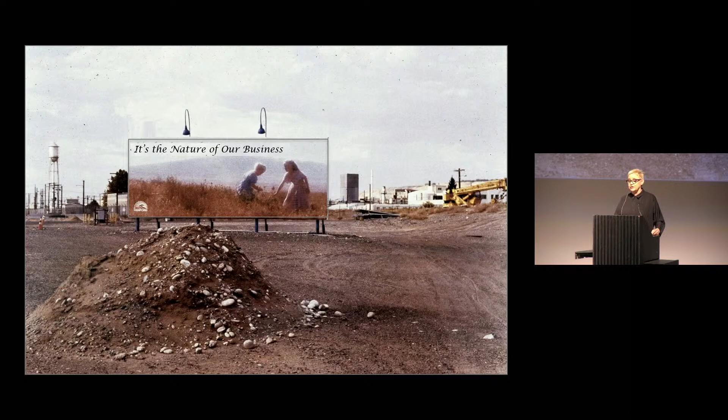This fascination with industry started early. It brought on, as a kid of one of 8, riding in a station wagon, riding past the belching refineries on the New Jersey Turnpike. I remember also being curious about the nearby modest homes of the workers in this part of New Jersey where the accent is quite strong.

That childhood curiosity grew while I was an art student in Pittsburgh. The steel mills really sealed my obsession that has fueled three decades of my life's work. And it's amazing. In fact, just a few years ago, I worked on the regeneration of this very mill. So things do come around.

There's no doubt in my mind, and I think in anybody's mind, when they see this map, that the landscape needed some landscape architect's attention.

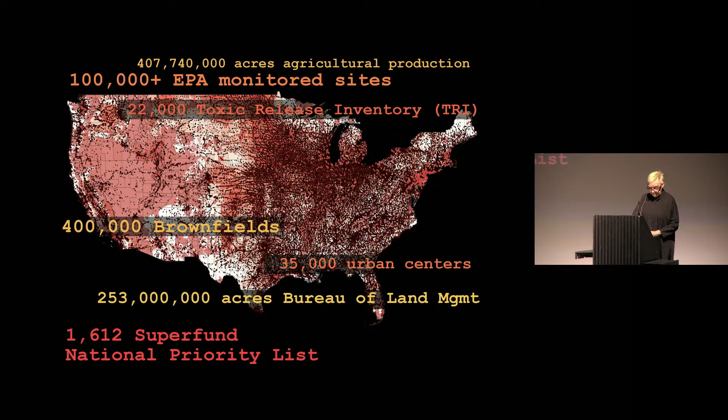Through both D.I.R.T Studio, through practice and teaching at University of Virginia, I charged into the unknown territory, and D.I.R.T was founded on doing research to probe that industrial business as usual. And teaching meant working with some great students to construct a new body of knowledge, design approaches.

So here are some of the stories. It's a bit of a retrospective, I guess because I'm getting old, but it's in five parts. I approach working landscapes with empathy and awe, like they are ugly ducklings.

I became really infuriated by these myopic technologies that were being applied by engineers—a quick fix, a green veneer, a type of camouflage. Also, reclamation laws did not hold the EPA or corporations accountable for authentic consideration of impacted communities.

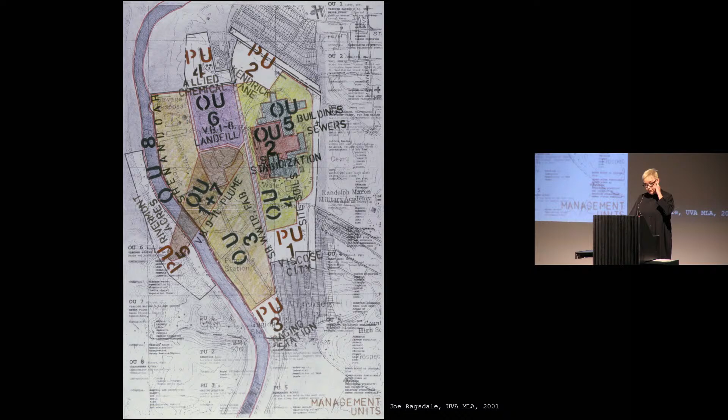My students dared to reveal what the regulations actually look like spatially on real ground with real neighbors. Here, a student translates very thick data from the EPA's operable units at the Avtex Superfund site.

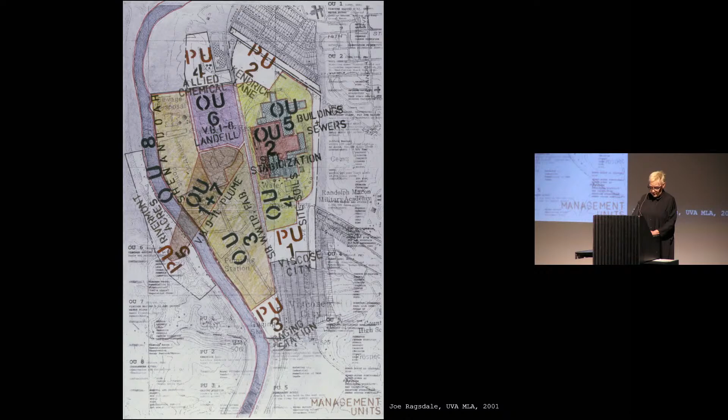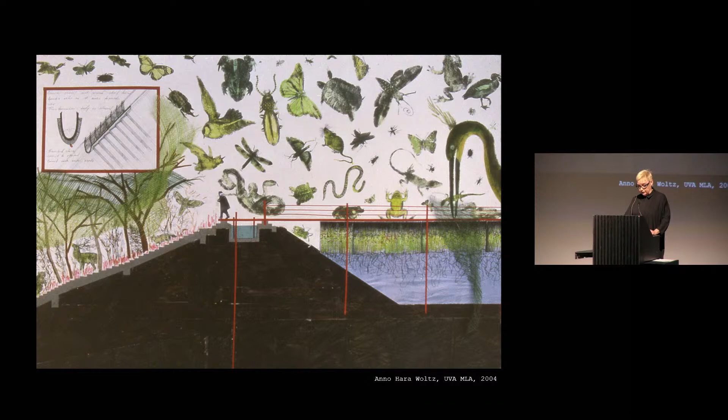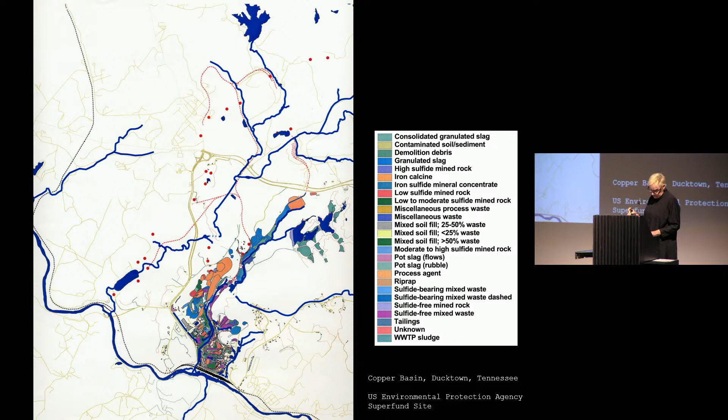While another student imagines a completely new kind of novel ecology that would emerge on the polluted floodplain through the use of biotechnologies. Meanwhile at D.I.R.T, we worked with the EPA in the Copper Basin of Tennessee, and we deciphered this sinister map with a pretty intense list of contaminants.

So we tried, in this case, to propose a passive treatment system, but the EPA was not up to the task. That happened over and over.

But at Vintondale, in the context of a nonprofit and a community-based effort, D.I.R.T joined a fantastic multidisciplinary team to make that transformation visible. The goal was a demonstration project in the coal mining region of southwestern Pennsylvania.

This was the site. It's a 40-acre floodplain with a former coking operation. And this is what it's like to work in the mine.

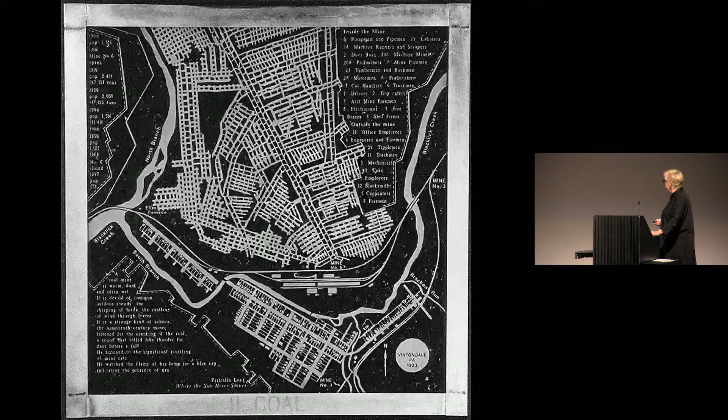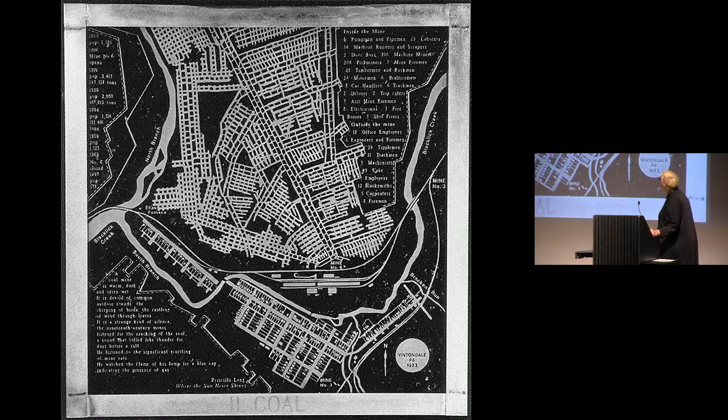Up here, these are the mine tunnels to scale with the town of Vintondale. This is the old coke works, and this is where we were taking note of the cultural presence of the workers, but also a lot of the poems and songs that were being composed about the coal mining in the region. So in some ways it was simple.

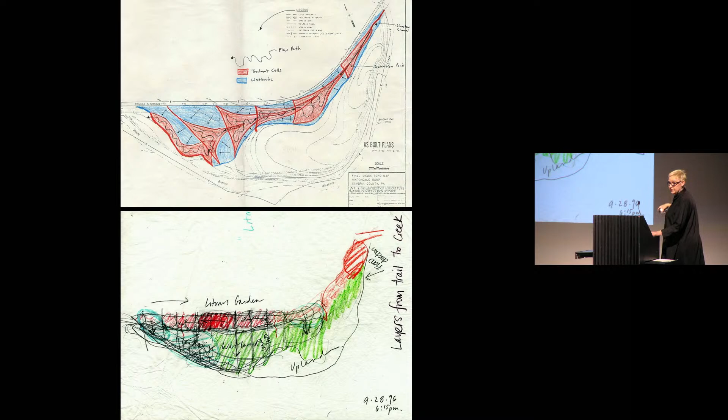And we came up with the concept of a litmus garden. This is the more detailed site plan where you can see the progression in these basins from unstable aqueous solution to biologically rich water going into the final rinse, we called it, of the wetland, and then being discharged.

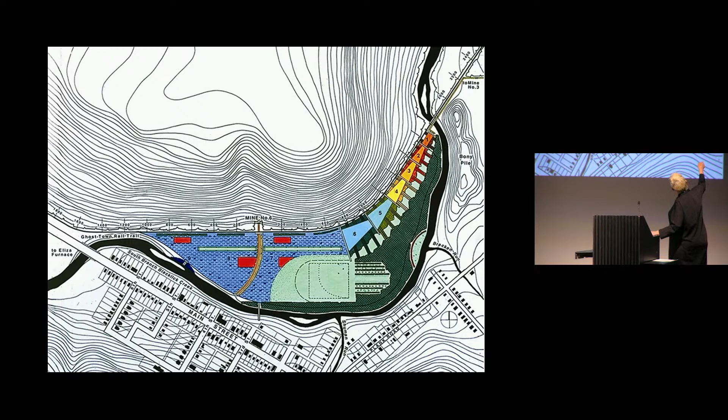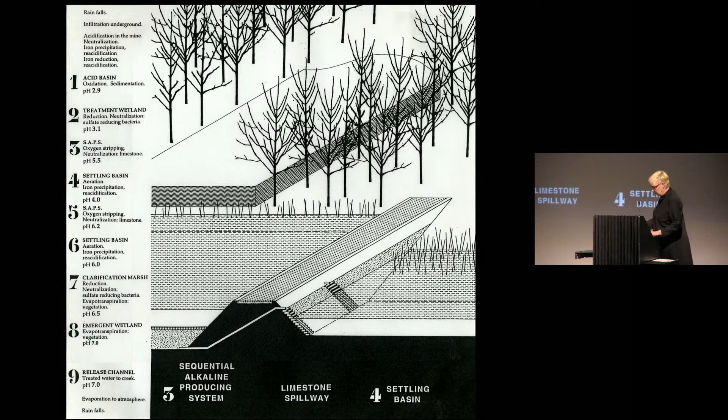But the discharge is being lifted up and taken through basically this giant washing machine. This is the sequence of what happens, 1 through 9, of this turbocharged wetland.

Those are the pH ponds. And here it is—you can see a nice AmeriCorps volunteer in one of the basins for scale. And this is it under construction.

Actually, this was us bartering with a local excavation company. They took away some of the bony that had fuel value in exchange for this excavation, this grading.

Folks in the town really wanted to help with the planting. And there it is, kind of doing its thing.

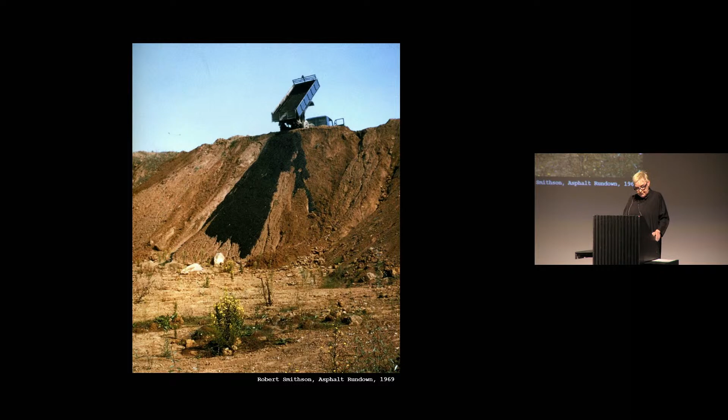His writings absolutely continually echo in my brain to push regeneration into thinking around cycles. That engaging processes, especially in working landscapes, means, in essence, taking the next shift. It's about the landscape's evolution, not the solution. Designing a course of action allows for the provisional nature of landscapes.

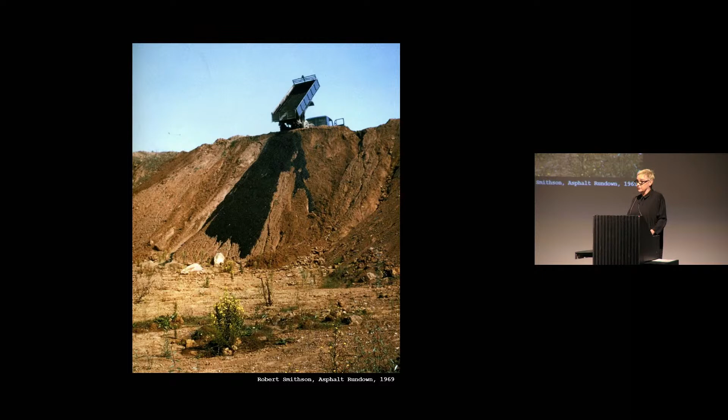So the charge is to take the next shift, to kill anybody that gets in the way with knowledge. Push the processes, not things. Question the motives. And when things get rough, call for backup.

Since 1993, my students have been game to look at alternative biotechnologies for the treatment of polluted soil and water, and they're wrestling with how to represent and think about those processes. This should be resonating with some of the students I met with today.

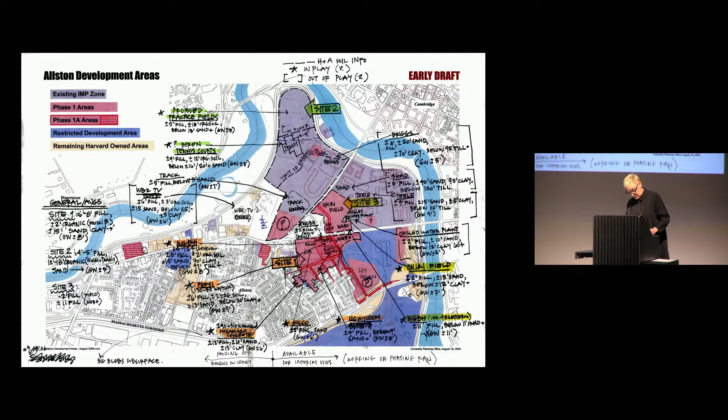While at D.I.R.T, we struggled with doing that with a client, Harvard's development group, who was about to gobble up the modest working town of Allston, Massachusetts, right opposite the main campus in Cambridge. And they actually made the mistake and thought that we didn't know how to read soil maps.

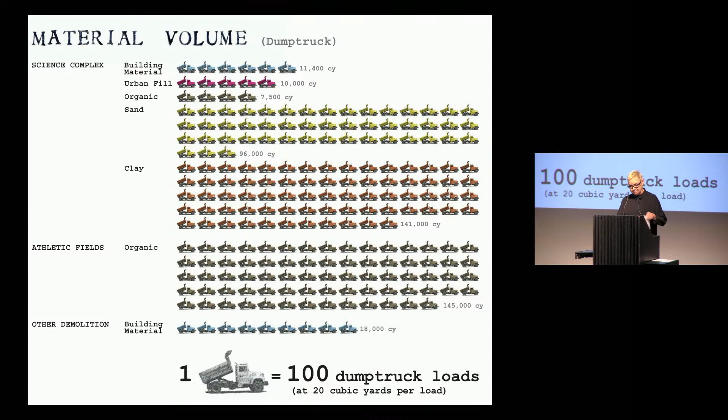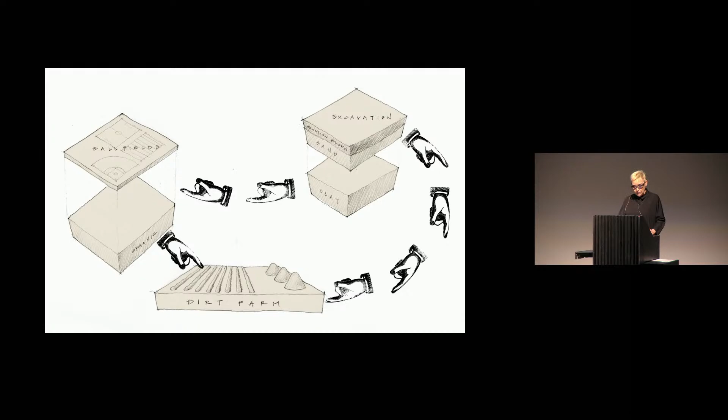We know how to read soil maps. We showed them that thousands of trucks full of dirty dirt and other soil compounds would run through the neighborhood streets. And we said, why not treat the soils on a nearby abandoned Sears site and reuse it locally or at any of the number of nearby Harvard properties?

We called it the D.I.R.T dance, a jumbo operation of cut and fill and treat. And in that case, as in a lot of other projects, we got a pat on the head and shown the door.

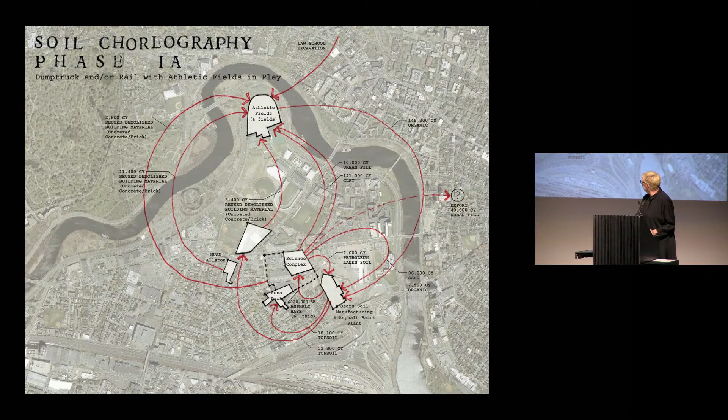Meanwhile, in Dearborn, Michigan, we had another go at this idea with the Ford Motor Company, and Ford and a great interdisciplinary team, of course, again. And you can see this is 1,200 acres, we say, of churn and burn and funk.

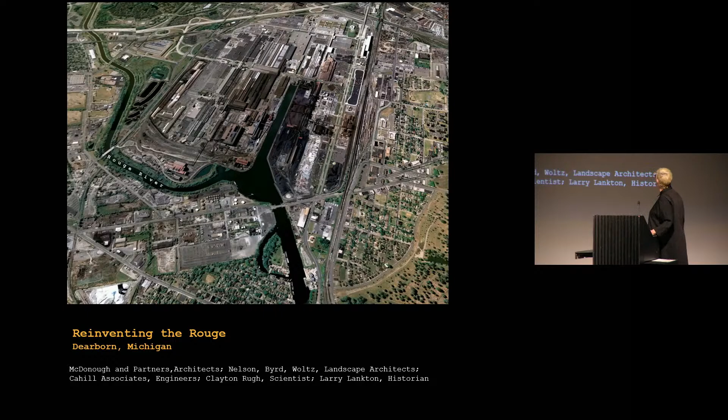In their 2000 Y2K campaign, they were looking for alternative ways of thinking about reinventing the Rouge river plant. And we found that first and foremost, their approach was extremely conservative. It was odd that we had to remind them of how important the River Rouge is, as it's been depicted by the artist Charles Sheeler and Diego Rivera.

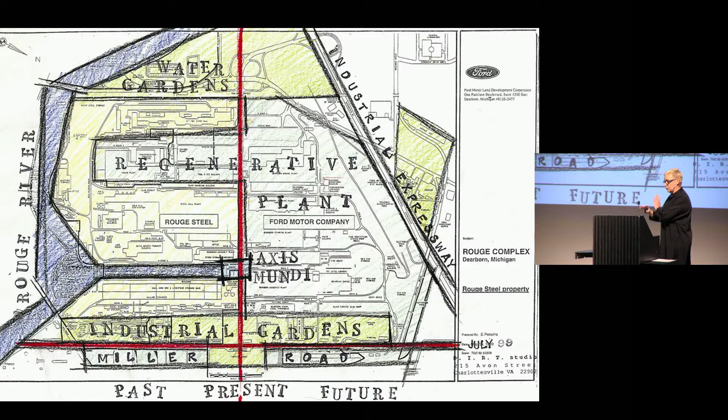This was a very first quick sketch when I landed in Detroit to conceive of this idea of a level of transparency along this main road where they had, in the 70s, put up soil berms and evergreens. They just did not want people to know what they were up to, and they probably shouldn't have. But now it was time to reveal.

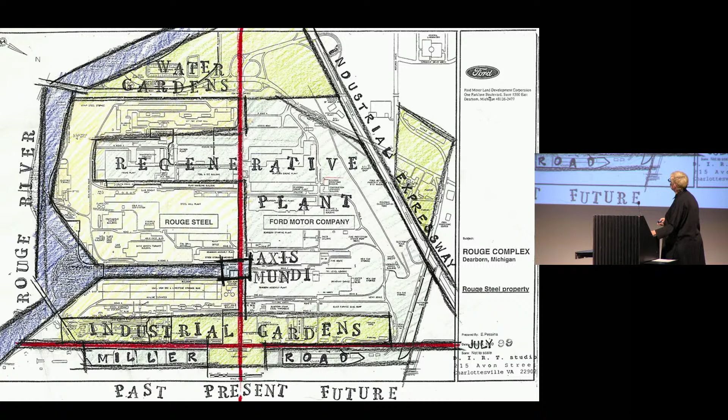So turning that road north and south here, you can see that we wanted to create a narrative along that road about the future, where Bill McDonough did his giant assembly plant with the largest green roof, blah blah blah. But our interest, D.I.R.T's interest, was down having to do with the past and the abandoned coke ovens.

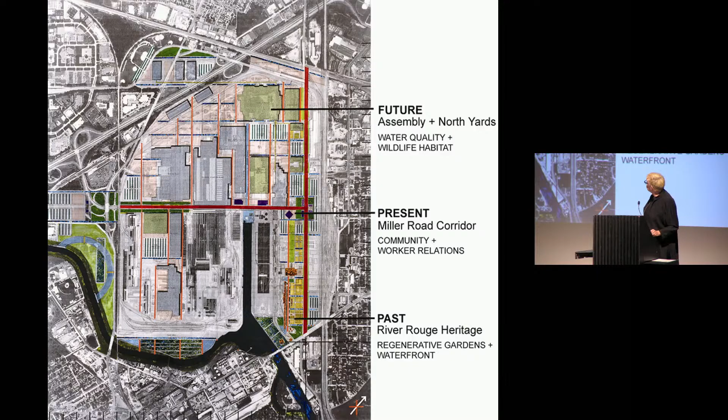So for us, what's kind of embodied energy into soils, albeit good and bad, is just an incredibly culturally rich landscape that should just not be covered up or thrown away.

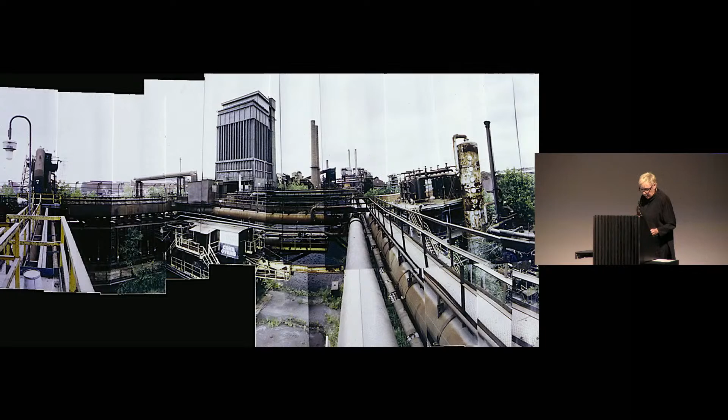By the way, that's Bonnie Clyde, Bonnie of Bonnie and Clyde. Mean mother. And this was the abandoned coke ovens. Pretty wonderfully sublime. And the idea was simple.

We used the word remediation because they had a fit anytime I said regeneration. And it was about curating the site, we made a huge argument with the historian to keep the coke ovens.

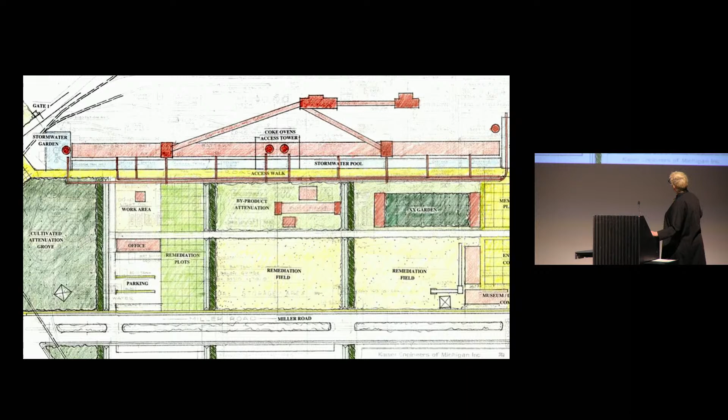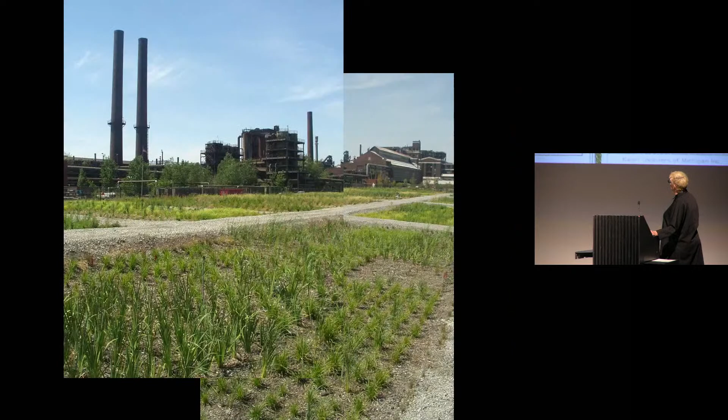And then in the foreground, along Miller Road, have these remediation gardens, these fields, where the scientist Clayton Rugh, local expert on phytoremediation, came and began to cultivate this garden for phytoremediation, but also for data that he gathered in order to move on to some other Ford sites.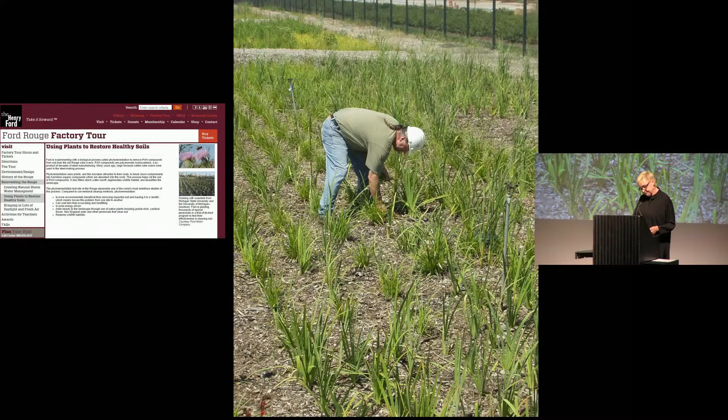In the end, even though I've met with a lot of opposition to this idea, Ford got a lot of press out of it, and Clayton, Dr. Rugh, gathered enough data to be working at a lot of other Ford sites.

Where am I? Not here. Anyway, unjust ground. There it is.

When you learn about toxic soils, you can't quite look at dirt the same way ever again. And when you translate that data to locate the pollution, you really truly see who's in harm's way. You know, poor soils, poor people. And this is unjust ground.

Still, I have to say that don't dig, don't test, don't tell is still pretty commonplace. And then if the soils are tested, conventional remediation kicks in: hog and haul to somebody else's backyard, and also covering it up.

And I kind of like to think that Cornelia, if she was whispering in my ear, would encourage me to persevere and to do the right thing, to champion that transparency, to cultivate some empathy, and make science a superhero.

In New Orleans, I collaborated with the artist Mel Chin, and also toxicologist Howard Mielke, to address the leaded soils in New Orleans.

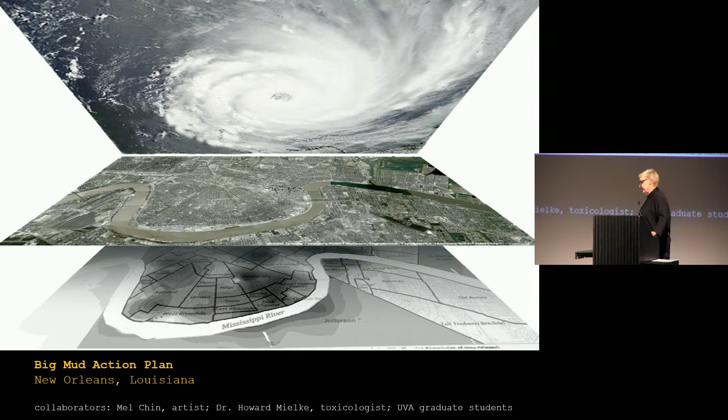In this layering of the maps, you can see this is the lead map that I'll show you in a minute, but that, you know, there's the city, and then that's, of course, Katrina. And like Mel said, the lead was the disaster before the disaster.

So here's the map. Dr. Mielke hadn't spatialized it yet, so he was quite happy about this, to see exactly what neighborhoods were in peril.

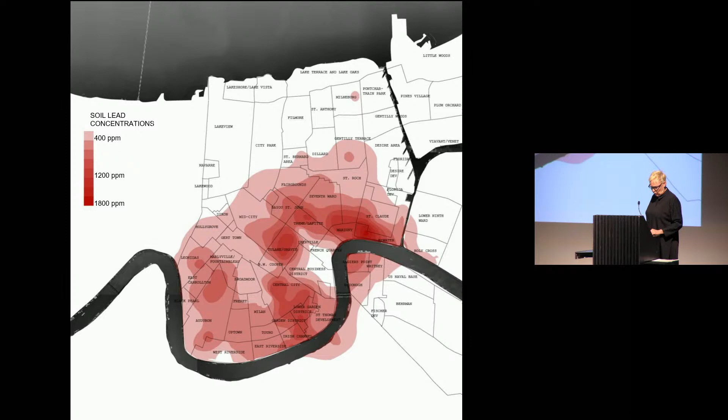And by the way, just a little fun fact worth knowing is that the EPA's maximum on leaded soils is 400 parts per million. But then you read the research, and in fact, leaded soils are hazardous at 100 parts per million. So you have to kind of wonder what the EPA is prioritizing.

We actually took on maybe a bit of a perverse idea where, with a lot of the properties and houses being gone, it was time to rebuild New Orleans from below the ground up, not on top.

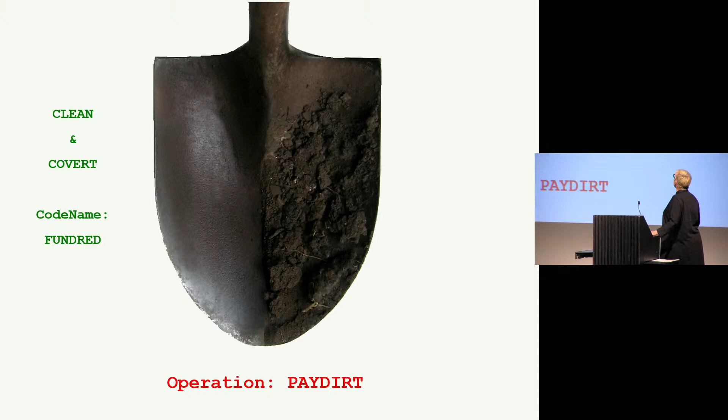Oh, this is this funny thing Mel did. So here we go, here's our operation, Pay Dirt. He worked on a fundraising campaign, and we did the difficult and dirty big mud action.

Science, love science. So lead combined with phosphate in this form of apatite 2 becomes pyromorphite, which is a non-bioavailable form of lead. So we basically were talking, and the other part of the recipe was...

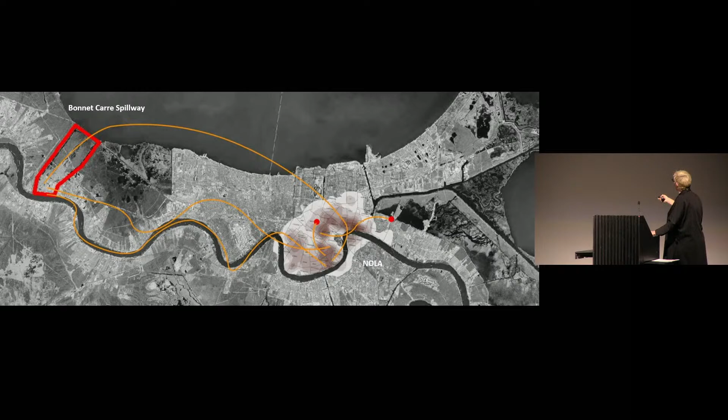...that we would produce sediment. We would lock the lead, and then there'd be sediment, and the sediment was plenty of it at the Bonnet Carré spillway, and we were looking at different ways, via barge, et cetera, to bring it in. So there you see the recipe is locking the lead and then adding the sediment and vegetation.

We came up with this idea of a nested scale of operations that goes from an extra large mud depot, where the materials would come in from the Bonnet Carré, all the way down to an extra small yard.

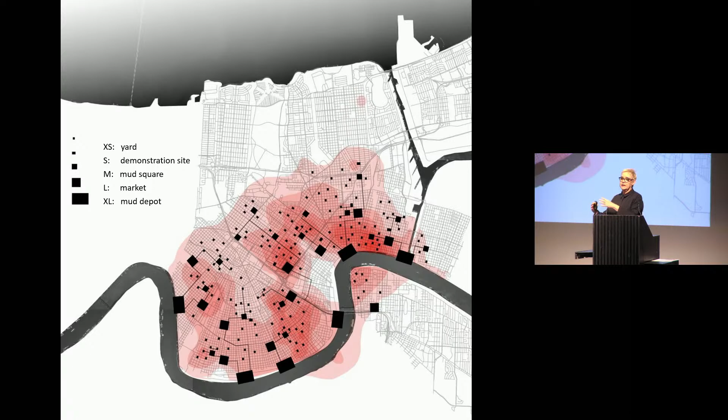And at every level of the scale, there would be different people involved. Our extra large would involve the Army Corps of Engineers and the city, and then down to the small and extra small, down to neighborhood and community organizations.

So there you see this idea that, again, it was an action plan, nothing like a master plan, to know how these materials would be distributed throughout the city.

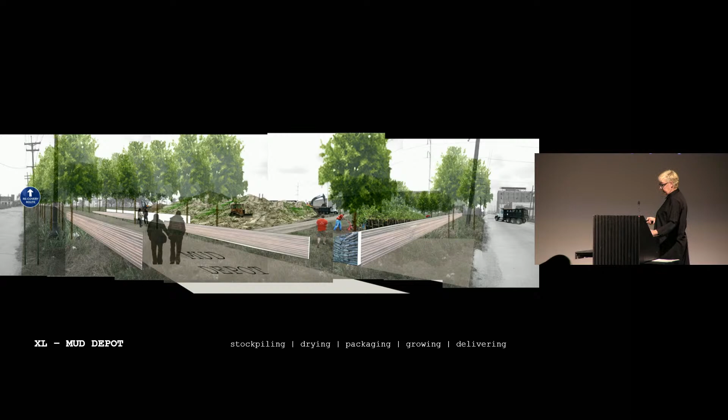So for working traces, I'd say that in all my digging around site histories, I think it maybe is already obvious, but site histories became absolutely paramount in D.I.R.T's design approach.

And I found myself starting to gravitate towards non-toxic, but still very degraded sites, manufacturing or infrastructure like the High Line, with folks in those circumstances living there and living very nearby.

Now I had to learn about working with those traces of hard-working sites, and the site forensics became paramount. And the primary act of design in this case became one of finding.

And in this case, form becomes more than site-specific. The form is generated from the site and by the site.

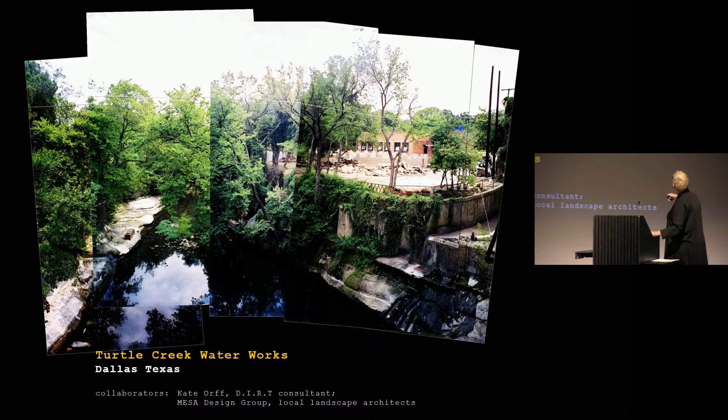So this is the Turtle Creek Waterworks. You can see there's the pump house, and this is the spillway right down to the deep creek. Wonderful old waterworks, pumps and tanks, et cetera. It's shocking that my client bought the property before it would get demolished and another kind of McMansion would be built there, but she rescued it.

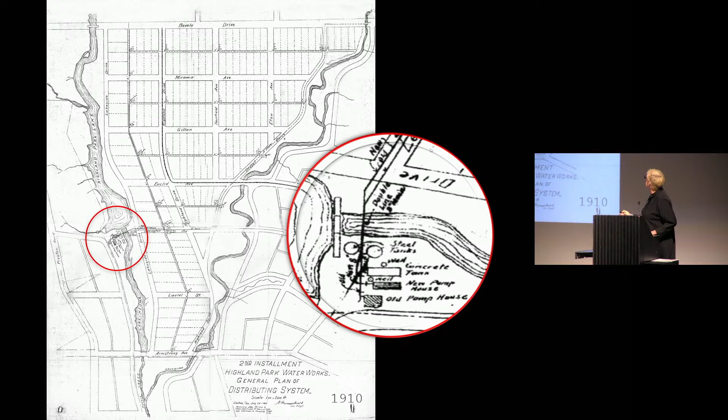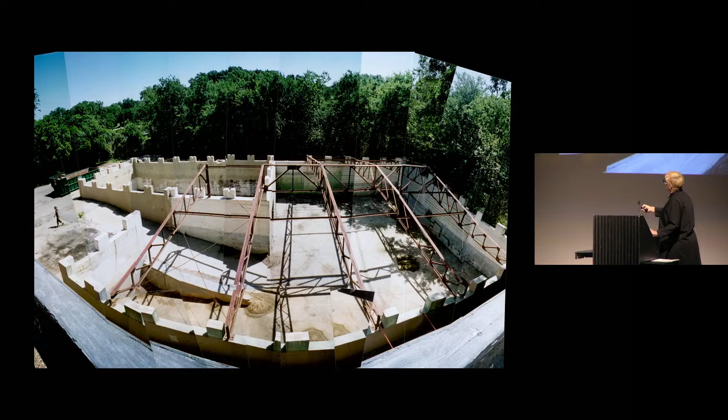And there it is. I arrived and was like, wow, all I could do is mess this one up. So, collaborator Kate Orff - folks know Kate Orff - she was my collaborator.

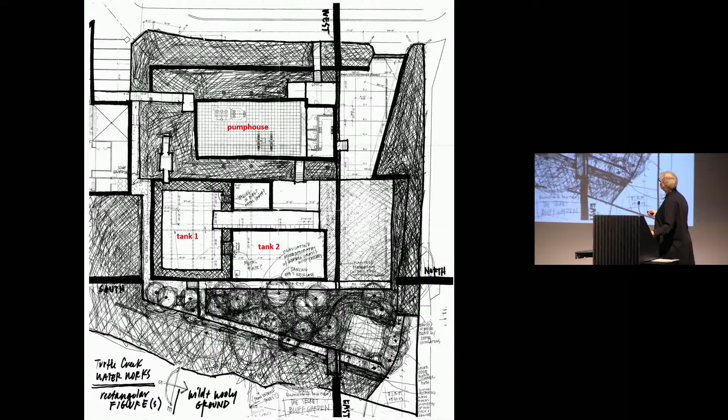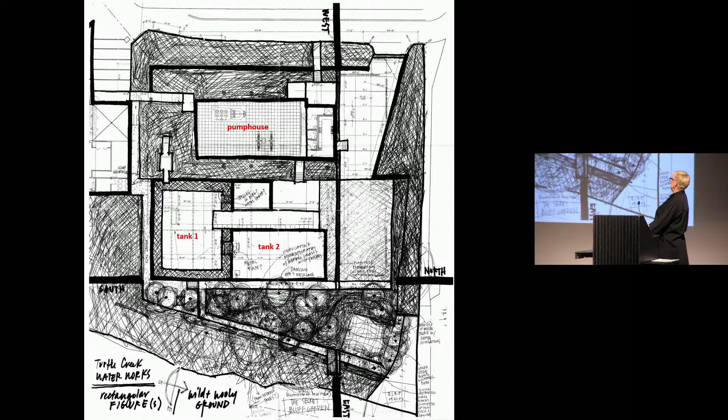The idea was super simple in terms of working with what was there, but maybe turning up the volume on some things and turning the volume down on others. There were the three voids, amazing voids, of the tanks. The idea was to pull up the adjacent wild landscapes, like a big blanket up around those voids.

And the idea was also around the tanks to make this kind of porous ground.

They're lovingly putting it into place. I have to say, one day I was hearing the crew talk in Spanish, and all of a sudden I heard 'Barney Rubble.' I went, Barney Rubble - thank you for that.

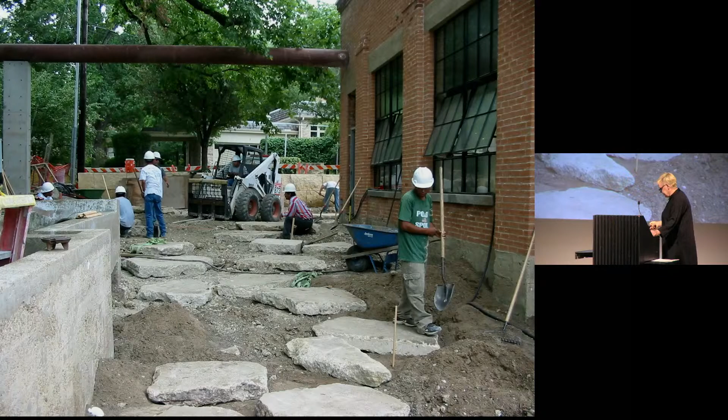In this case, in the water filter tank you saw, we found the plumbing. We just kind of, like I said, found the plumbing and turned it back on - which she does in very limited ways, to not go crazy with water.

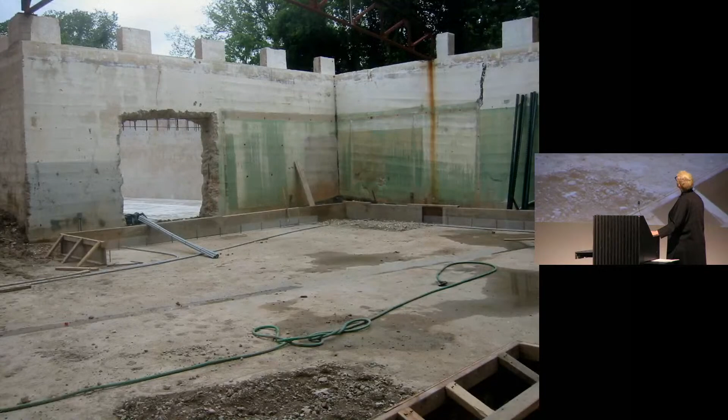But this is kind of bringing back the operation of the pump house - how we found it, kept it pretty much the same. Again, we just found the plumbing and turned the water on.

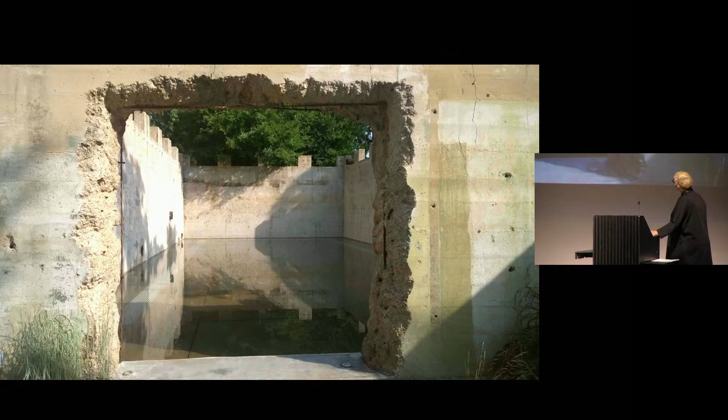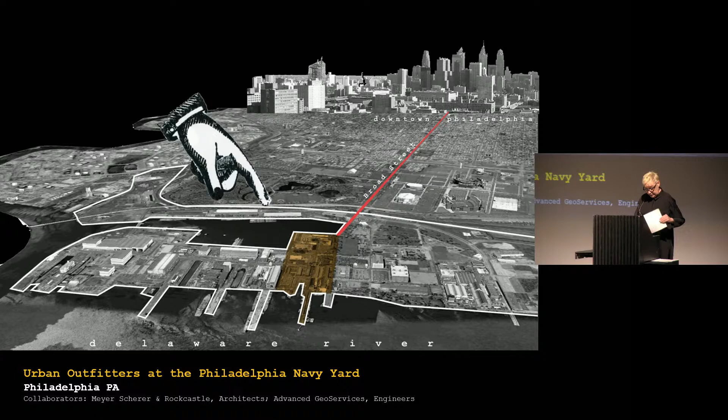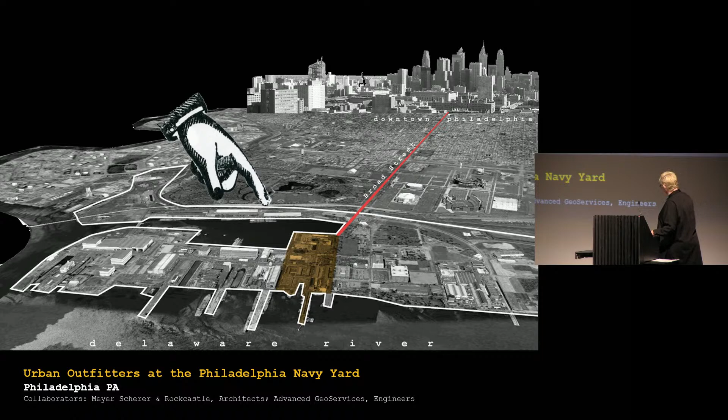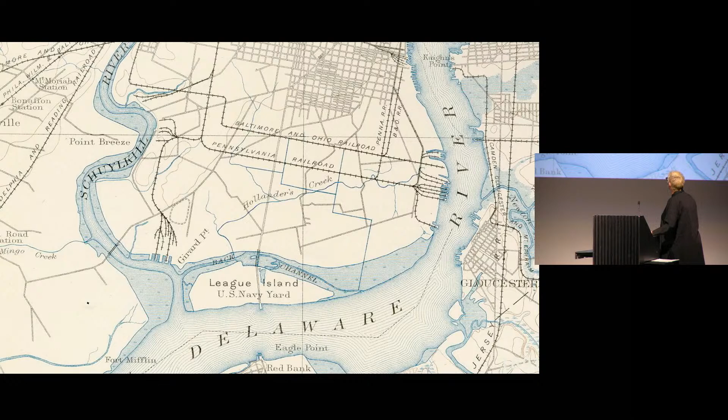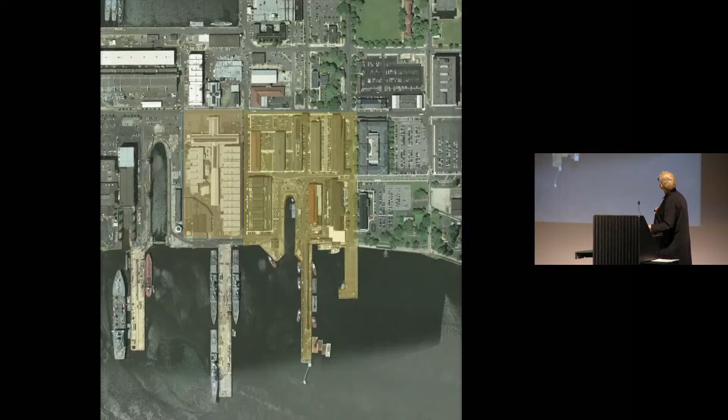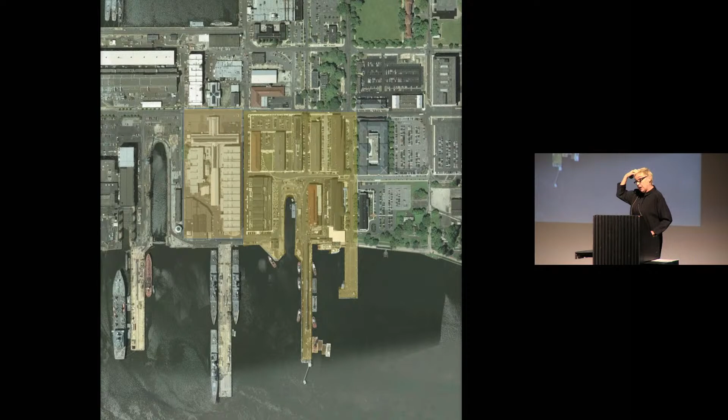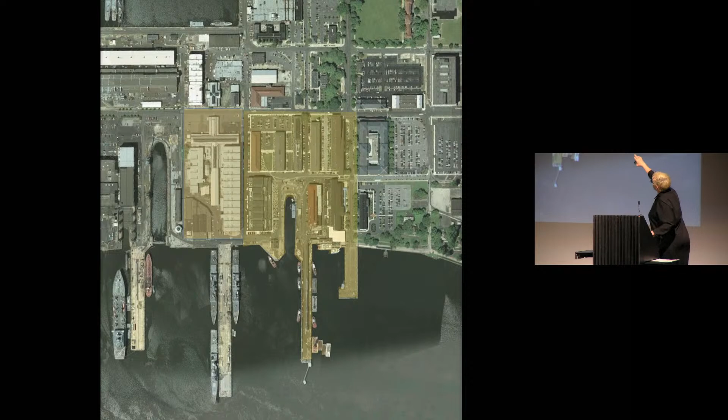Pretty big site - really, really large, massive buildings. I have learned a lot about scale working on these projects; I always add a zero to what I initially think. And just the beautiful grain, and then that's the dry dock that's carved out in the middle there.

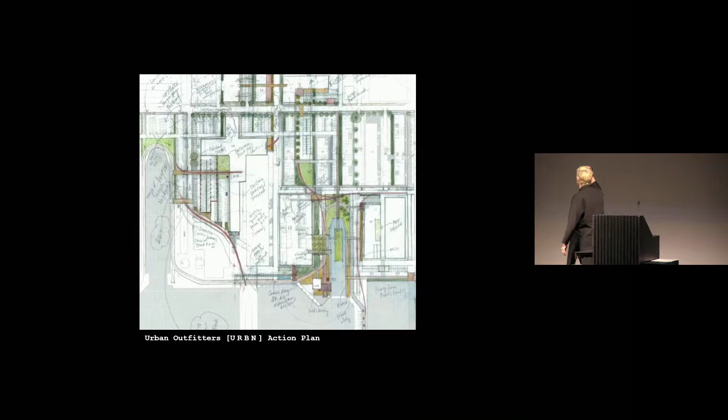So these are part of the forensics, the really important forensics - sorry for the quality of this. But this is also a case where we do an action plan, not a master plan.

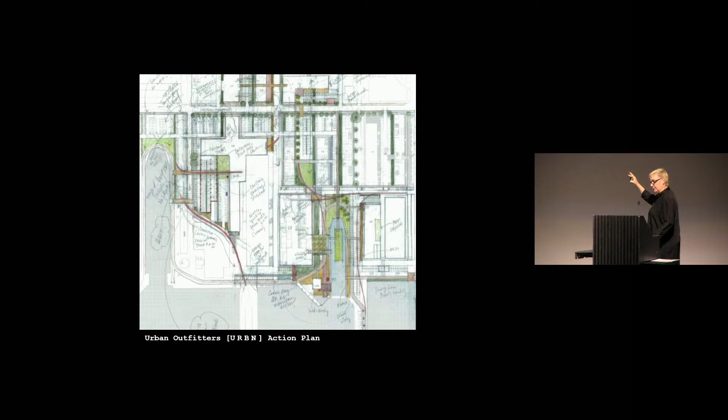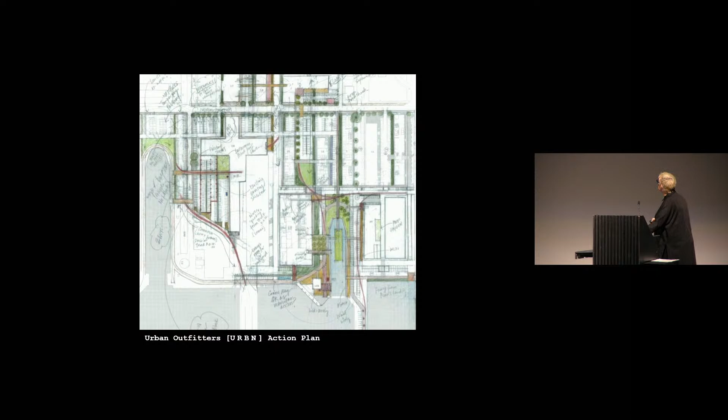This is me working with the head of Urban Outfitters, Dick Hayne, and we're just talking about what will structure the landscape to develop over time. As you can see in red, I just became obsessed with the rail lines as a way to structure their campus - and this is what we encountered when we got there.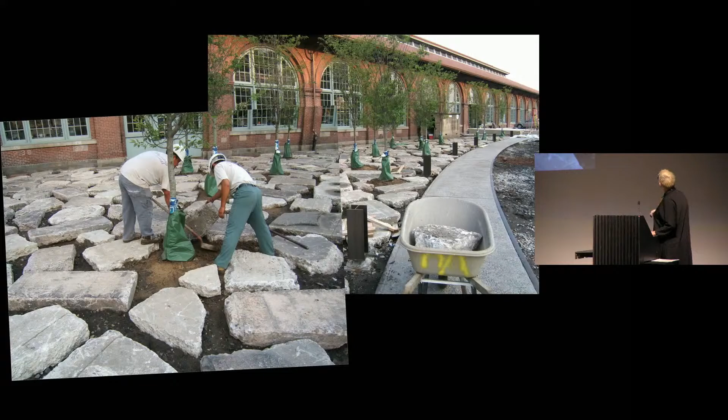And all the other debris that I didn't allow to leave the site, they stockpiled it, so there were sized pieces of concrete, brick, and asphalt. That's my wonderful contractor who learned how to do Barney Rubble like an expert. And there they are, having at it.

And Barney actually became kind of part of the urban branding, and it took all sorts of forms here in the garden at Building 543. It's black locust and some wild and woolly things, often left purposely, evidently, to winter over.

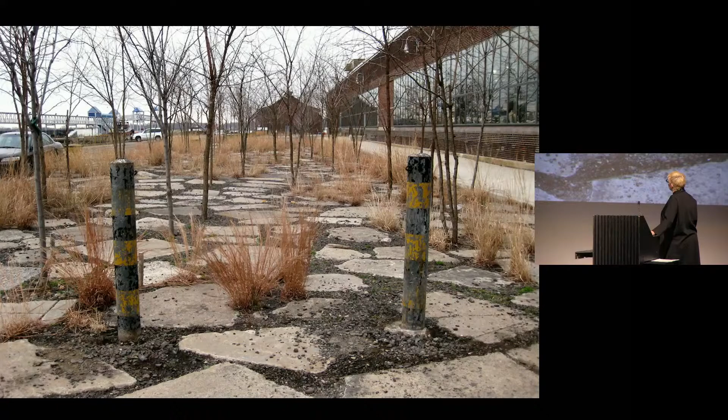This is a thing where I think of Dan Kiley, the landscape architect, and if he saw this slide, I know he would say, well, I didn't really design this, but I'm going to take all the credit.

Over at Anthropologie, it was funny because it turned out—I should have brought it—this picture of the number two guy, the main dude in the construction trailer, because on it he had all of the definitions of Barney, and Bam Bam, the whole family. We got the whole family in there.

There's Betty. So Betty was the combination of concrete and brick. This is a drawing that I would never show Dick Hayne. He was like not into anything like this.

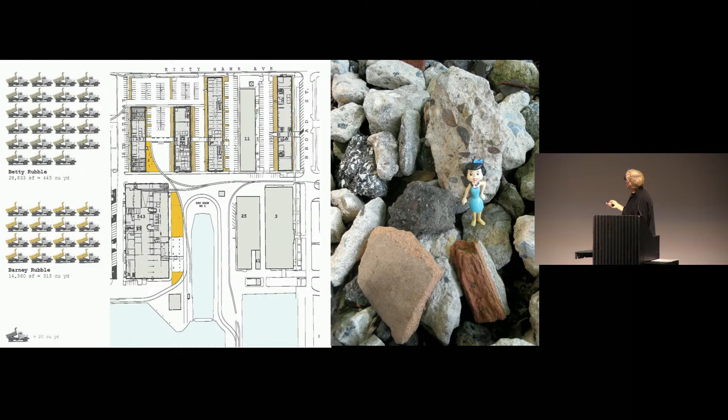He once called me and said, 'Who do you think you are, Al Gore?' I was like, anyway, so clearly I stuck so-called sustainability in the back door. But I think we were at 90% reuse.

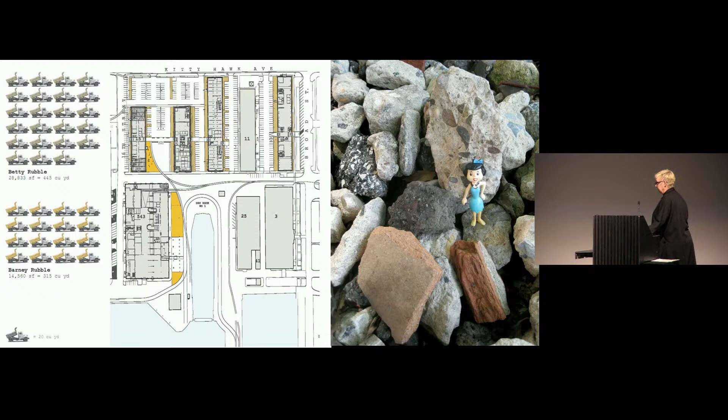And in later phases, we actually imported demolition debris from other projects in the yard. That's Betty, underneath here—these long hedgerows that are along the west side of the buildings.

And if anybody knows who has red hair in the family—Wilma. That's Wilma. Yep, exactly. She's in the house.

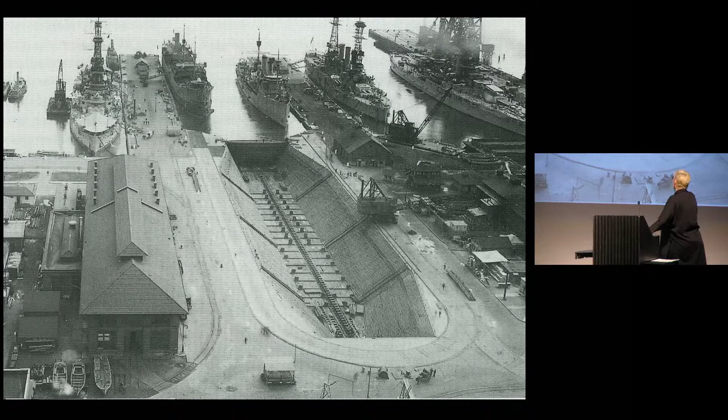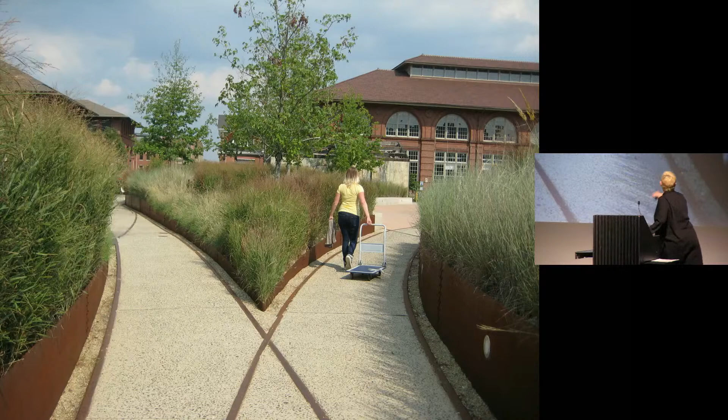And in a further phase, we went about working on the dry dock and more rails, like here. And they've become part of the everyday—that's reused, recycled steel walls, in all their iterations. I don't like the idea of runway.

And here's opening day, and this was a pretty interesting negotiation with Urban about the dry dock and the nature of the dry dock. I was calling it a park, and there were all sorts of ways in which I needed to resist anything that felt like it was privatizing the dry dock, because it's the heart of the yard geographically and also historically.

So these are the moments I love that are very quiet and about letting the ground speak.

I got one of the nicest compliments, observations. Someone from Anthropologie said to me, the designer, 'I've always—I now feel like this landscape has always been here, but now I'm a part of it.' It's just like, yes.

Yep, okay—fallow matters. When cities like Detroit—just this image—I've been working sometimes on singular industrial sites, wanting to expand into thinking about the fallow land that surrounds them, because in fact this land is collateral damage of lost industries and the lost jobs that go along with that.

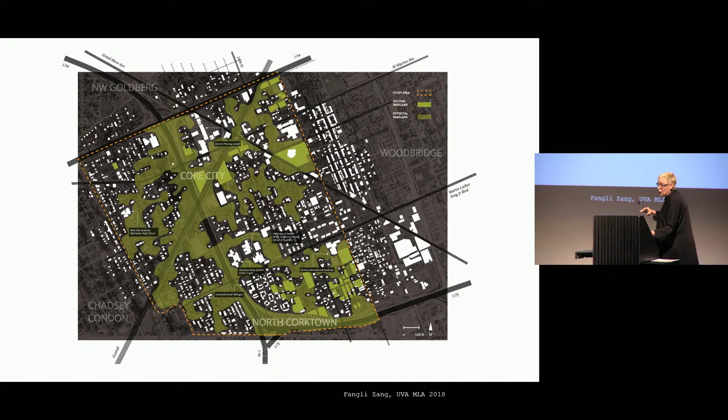In the case of Fangli, the neighborhood that I'm working in, Core City, all of the land that's become depopulated was actually an opportunity where you could think of it as parkland—not expensive, but expansive—beginning to make for a completely different type of urbanism.

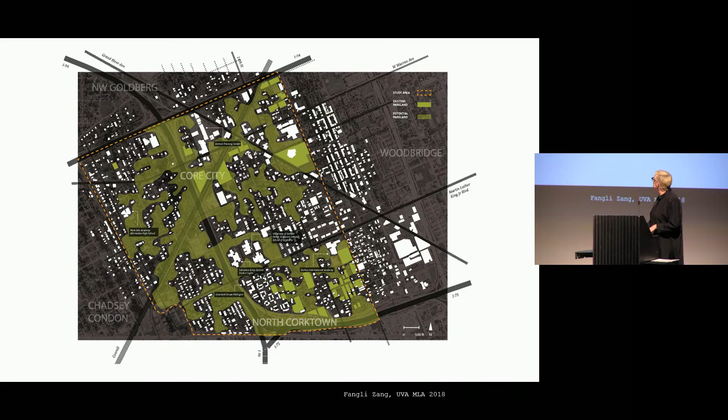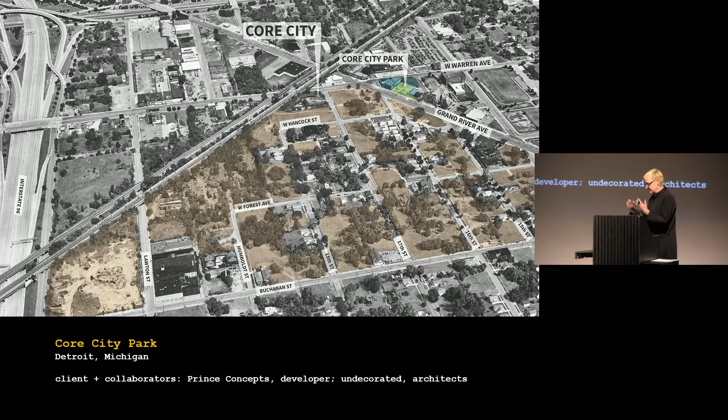When I got to Core City, here's the aerial showing what it was, this kind of open terrain. The developer, this amazing developer, told me in our first conversation on the phone that he'd like to think of, conceive of, and work on Core City.

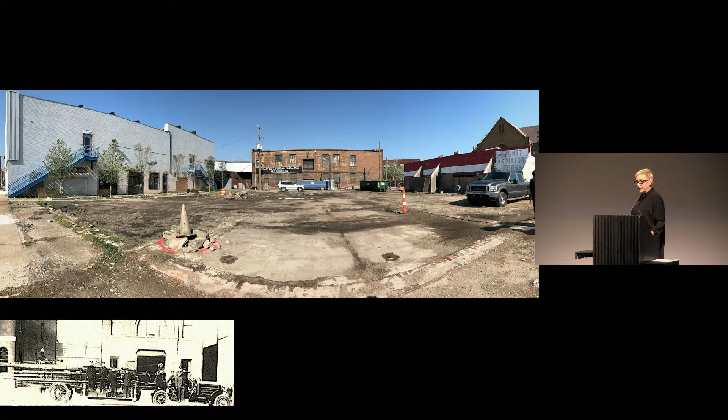His name's Philip. Philip called me. We stood at this site, a parking lot amongst other manufacturing cities, these kinds of smaller industries about one or two stories. Philip asked me, 'What would you do?' I knew there was an old firehouse there and asked when it was razed. He said the 70s. I said, 'I dig.' Then I thought, did I just say that? Because he had a backhoe on the site the next day. I said, let's let it emerge.

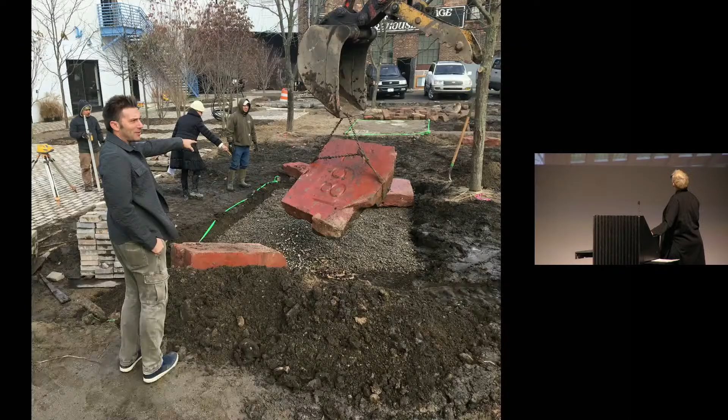There you see it. It's right along a very busy Grand River Avenue, small, 100 by 100. This was the day I was like, oh my God, thank God Philip is there that it worked, because one day they brought up the cornerstone of the firehouse. There's Philip, my client, very happy that with that coming up from the ground, that place had an amazing deep story, over 100 years old, older than us.

We basically arranged every piece of stone that came up into different terraces. You can see sometimes small. Here's the day with the neighborhood party. All of that came up, and then the idea was that when we had excavated pits, we would have an urban woodland planted. This is slag, by the way, this granular stuff.

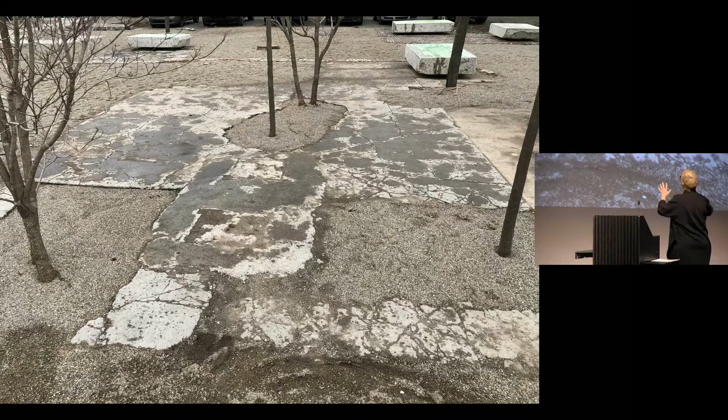Here's an example, early on, when we used tan stone. This was when the backhoe would come over to excavate places, actually we called this Bam Bam because he used to come over and just bam these holes out. This is the existing drive that used to exist at the firehouse, and just layers. It's like I feel cheating, you don't have to design anything, it's just there. A happy day there, and there you see it, a temporary installation of containers that turned into benches.

So the park became this kind of inaugural public landscape for Philip to now build upon. I'll be going to Detroit soon to work with him on another park. He calls it Core City Park 2, and some other landscapes.